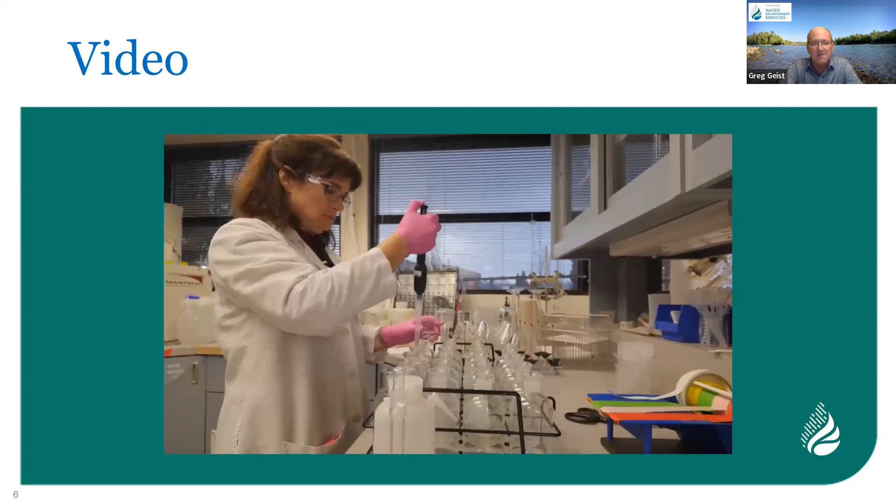I love so many things about Clackamas County. There's so many opportunities for recreation and the people are amazing. But what really sticks out as special for me is the water, our lakes, our streams, our rivers. There's something just magical about water. It's as important as the air that we breathe. It provides our health. It provides our food. It provides our sustenance. We need to make sure the rain that falls on the ground is clean and safe by the time it reaches our rivers and streams. We call ourselves a learning organization. We need to innovate all the time. We always want to try to get better. And for us, a lot of that is connecting with the community, understanding what their values are, what their priorities are, and making sure that we're positioning ourselves in a way to provide that for them.

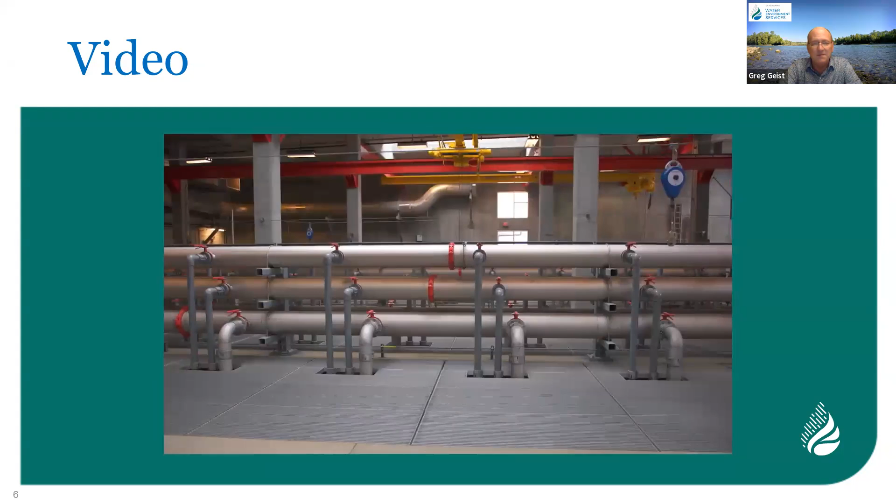We don't call our facilities sewage treatment plants. We call them water resource recovery facilities because that's what they do. They make clean water, that's very important. They also make energy, electricity with what goes down your toilet. And we make fertilizer that we can use out on agricultural fields. People expect clean water. They have high expectations around that. And the idea that we can help protect that, and that's our job, how lucky can a guy get to have that be your job?

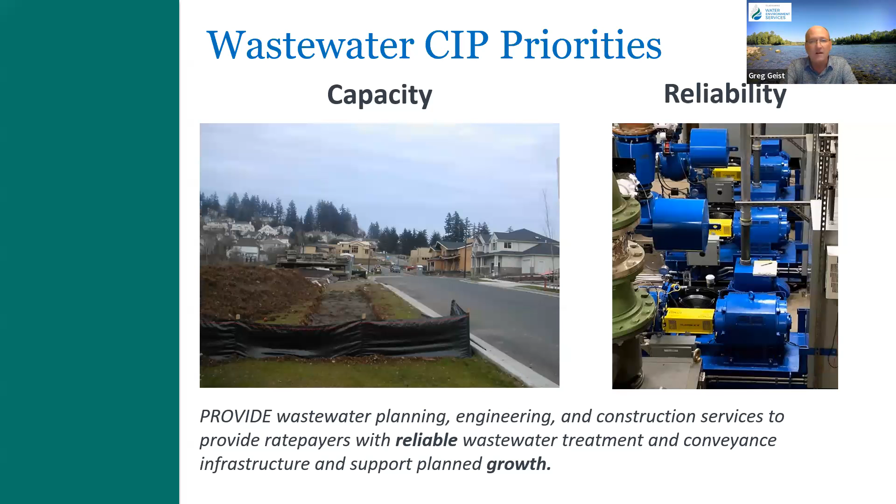When we think about what our capital needs are, like I said, this is primarily a project that we need for future growth and capacity in our collection system. But most of the work that we do is actually more around reliability. We have infrastructure that's been in the ground since the 70s, and a large part of our capital investment is to maintain the assets that we currently have. The other piece, 50-50, 60-40, is around capacity. And again, that's what this project is primarily about, although there are reliability components to it as well. Next slide.

So, again, we try to take a very thoughtful approach to how we present these projects, how we develop these projects, and how we pay for these projects. So what we have is what we call a 5-year capital improvement plan. And that is a synthesis of all of those master planning studies that we have done, coupled with a financial analysis that determines how we can pay for those projects over time. So we start with a 5-year capital improvement plan. We have an annual capital budget that's based on that.

We run that through our financial modeling and forecasting to make sure that we can pay for it and that we can sequence our capital plans in a way that results in reliable and predictable rate increases over time. We propose that budget to our advisory committee. Ultimately, it goes to the Board of County Commissioners for approval. So this is one of many projects in our 5-year capital improvement plan. And again, there's opportunities for stakeholder involvement throughout. And this is really the kickoff of that stakeholder involvement for this particular capital project. Next slide.

And I guess with that, we can start getting into the details and what this project really is and what it's all about and where it's going to be and how it's going to unfold. So I will hand it off to Jessica Rinner, who's the project engineer for this project.

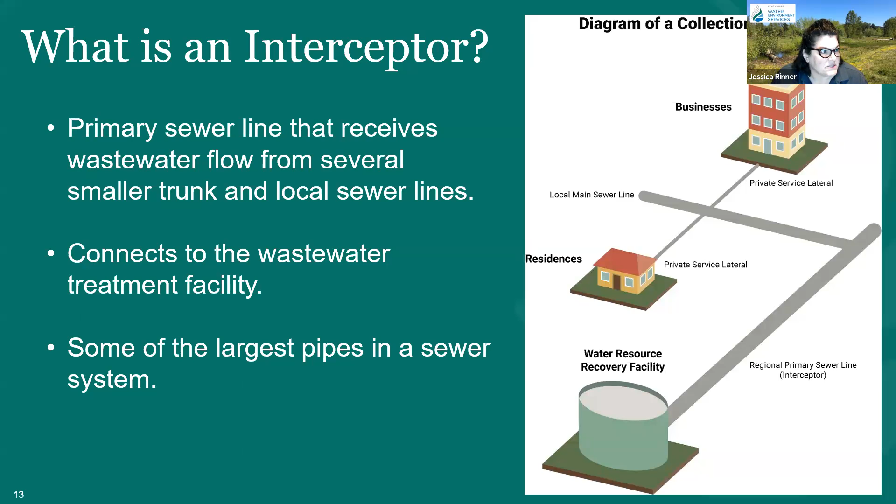So why is this capital project needed? As Greg mentioned earlier, WES does a lot of planning to make sure we have the appropriate infrastructure in place to serve our customers and our community. One of these planning documents is the Sanitary Sewer Collection System Master Plan. A master plan, as you saw in an earlier slide, is a very common document that utilities or service providers use. It is a tool used to evaluate the existing conditions and then project or plan what will be needed in the future. Our master plan has a 20-year planning period.

Our last master plan was completed in 2019 and projects wastewater flows through 2040. From this plan, we can then determine when and where in our collection system we need to do improvements to address these future flow conditions. Also at this time, I just wanted to briefly touch on what flow is. I work in sanitary sewer collection systems. Flow is the wastewater that is transported in the collection system to the treatment facilities.

When working in the collection system, there are two very distinct flow patterns. One is our dry weather flow. This occurs in the dead of summer when the ground is dry, creeks, streams, rivers are all at their lowest points. Dry weather flow is concentrated wastewater from the homes and businesses that are served by the collection system. It is the lowest amount of flow that we need to transport through our system and treat at our facilities. Dry weather flow is easy to predict. We know how many homes and businesses are connected to the sanitary sewer and how much wastewater these typically generate in a day. So dry weather flow is very predictable.

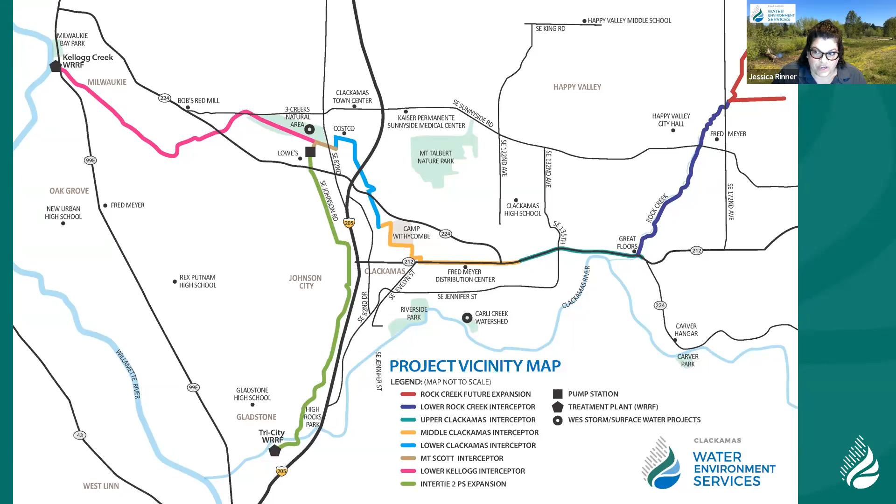Next slide, please. So now we're going to focus just in on the Clackamas Area Interceptor Improvement Project. We have set this presentation up to feel like a virtual driving tour of the project. We're going to start at the most upstream end of the project limits and go with the flow to the end of the project limits. So everyone, please fasten your seatbelts.

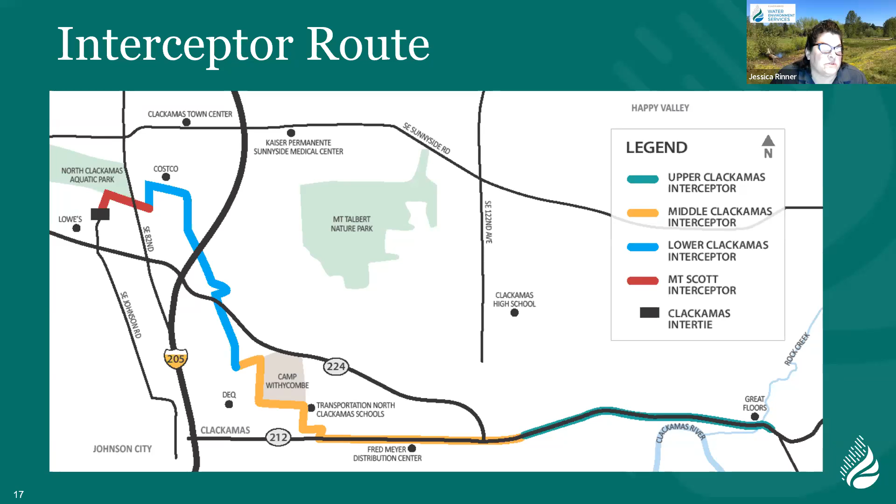So from Great Floors, the existing interceptor runs west, paralleling and sometimes crossing Highway 212 and 224. As I am sure most of you are aware, this highway corridor is very congested with many industries and businesses along the route. It is also very congested with many existing utilities, so finding a space to install a new large diameter sewer will be challenging.

And keep in mind, as I will continue to stress, the new sewer has to continuously slope down so that the wastewater will flow freely. If we build half of this and run into a conflict that we can't go around, we're in trouble. We'll have to remove that conflict. We need to slope down for 5 miles.

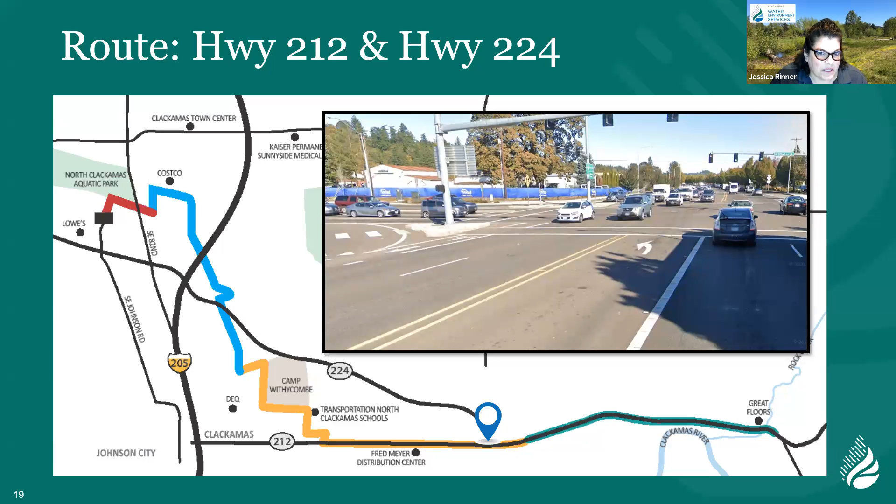The interceptor turns north at approximately 102nd Ave by the North Clackamas Bus Barn and winds its way through the streets, zigging and zagging north and west, crossing in front of Camp Withycombe to our next stop on the tour. This next stop is also the end of the Middle Clackamas portion and the beginning of the Lower Clackamas. Next slide, please. And then at this point, Zach is going to take you through this stop on the tour.

Good evening, everybody. This is our second actual stop along the tour. At this site, we're just north of Highway 212 and Camp Withycombe is just to the east. Just north are the radio towers you're probably all familiar with along the I-205 corridor near the Sunnyside exit. At this site, our interceptor crosses the main railroad line in this area. We will need to employ alternate construction options or alternate routes at this site because it's not possible to dig across or through that facility.

There are other issues that go along with this site as far as access, high groundwater, and flat topography that will present some construction issues and maintenance issues as well. Next slide.

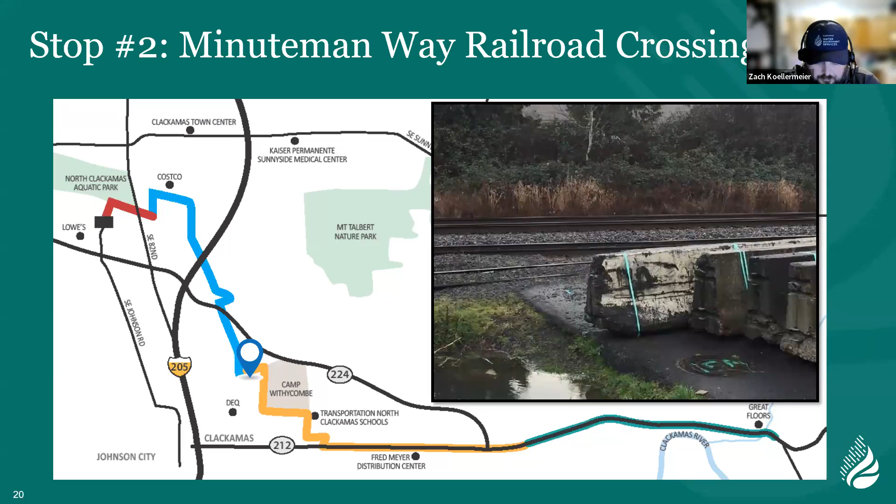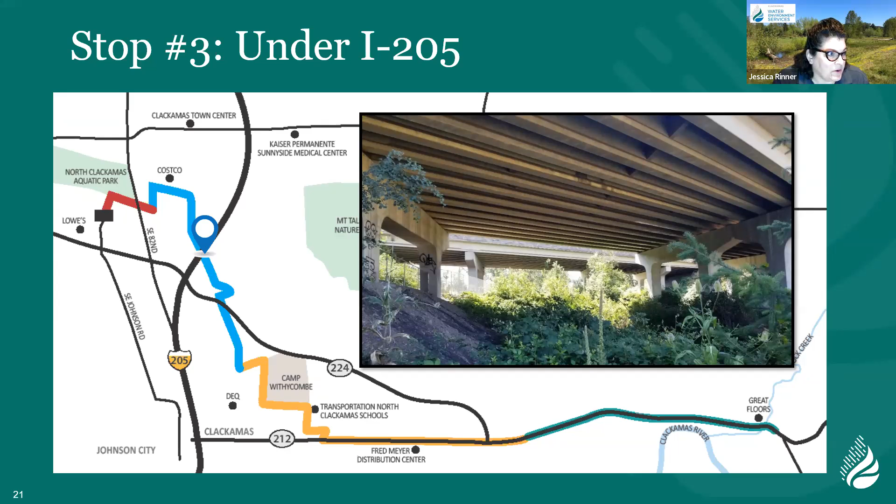Cool. Thank you, Zach. So continuing along our route, we are now following the alignment of the Lower Clackamas Interceptor, and we come to where the interceptor will need to get under I-205. That's what is in the picture above us. In this location, we have an elevated portion of I-205, we have a creek, we have environmentally sensitive areas, and we have the ODOT bike path, which is heavily used by bikers commuting through the area. We are looking at trenchless installation methods to install a new pipe here. Next slide, please.

This is a low-lying, environmentally sensitive area with wetlands and stormwater control ponds in close vicinity. We also have, if you were able to pan your head and look to the right, 82nd Ave is elevated and crosses the tracks and the creek at this point as well. Again, a very tight, difficult location to install large diameter pipe.

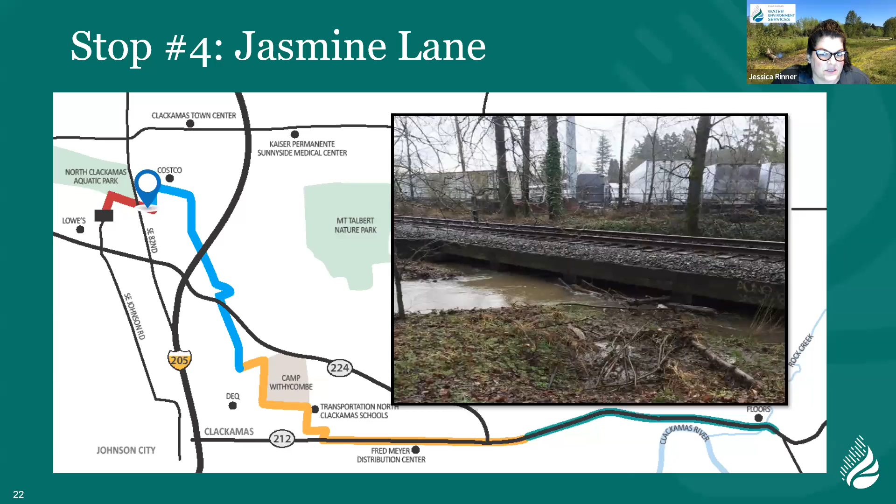A trenchless installation method will be used here to get under the creek and the railroad tracks. Once we are on the south side of the tracks, the pipe will continue west to the next stop on our tour, which Zach will tell you more about. Next slide, please.

This is our 5th stop along the tour. At this site, we're just north of the Intertie 2 pump station, and the two landmarks you may be familiar with are we're just north of Lowe's and the McFarland's landscape off of Highway 224. This is the downstream extent of this project.

We do have a project at our Intertie 2 facility to increase capacity to divert flow to our Tri-City water resource recovery facility. This is where we have the ability to increase our capacity to meet future needs. This project will be closely coordinated with this pump station project. The key takeaway from this site was the size and magnitude of the pipe currently, and how much larger we will be making it as part of this project.

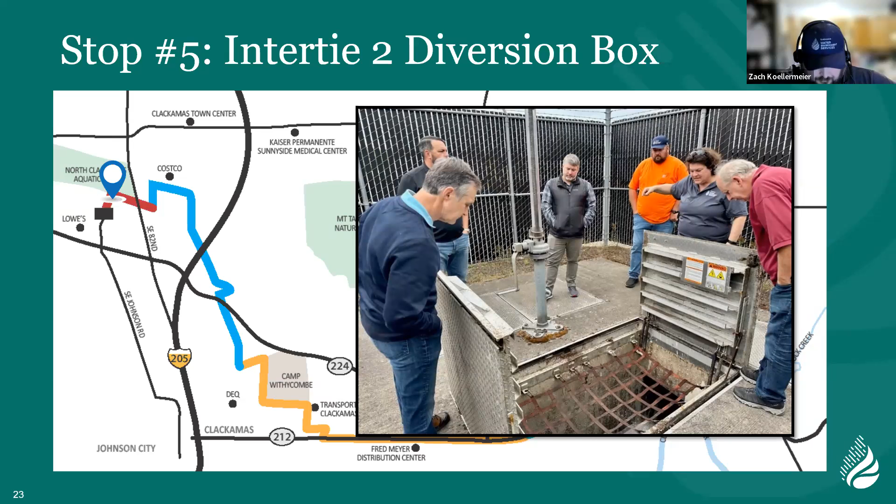You can see us looking down on the hole, and you could hear and see the magnitude of the flow there. This was the one site that we opened and allowed participants on the tour to look in to the current facility. Next slide.

So as Zach mentioned, the last stop we wanted to share with you, it's not part of our Clackamas Area Interceptor Improvement Project, but it is being upgraded currently by WES. It is our Intertie 2 pump station. This pump station uses electricity to pump sewage away from our Kellogg Creek facility to our Tri-City facility for treatment. The station was constructed in about the 2012 timeframe and can pump up to 10 million gallons a day of wastewater.

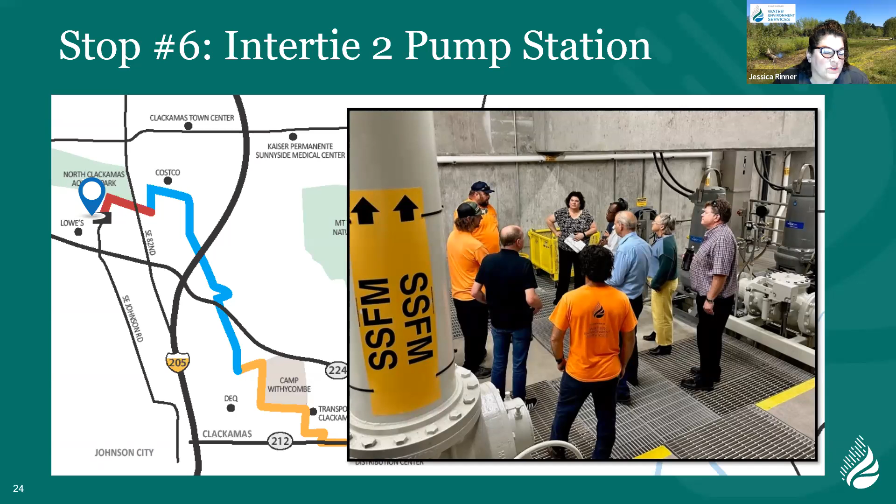WES is currently increasing the capacity of this pump station and force main to pump approximately 20 million gallons a day to our Tri-City water resource recovery facility for treatment. Next slide, please. So now that we have shown you the route and some of the more challenging locations where this project will install new interceptor pipe, we wanted to give you an update on the schedule and activities. Our project manager, Eric from Carollo, will share this with you. Next slide, please. Thank you, Jessica.

So with a project of this magnitude, as you can well expect, it's going to take many years to identify routes, design it, and construct these improvements. So for this first phase of the project, we are designing all of the pipelines up through a 60% design, so that we can ensure, as Jessica mentioned, that we can get all 5 miles of this pipe into a location that has the least amount of disruption to other utilities and impacts to the public, but yet also can convey that flow by gravity all the way to the Intertie 2 pump station, or the diversion structure, as part of this project.

So you'll see, as part of this schedule, we've started with the field work through fall and winter of this year, and then it'll proceed straight into 30% design of selected alternatives of how we get across some of those challenging features, like the Rock Creek Ravine and under I-205, and then again under the Mount Scott Creek and the railroad that you saw all along the route. We'll also be taking that all the way through 60% design, and we'll be starting to look at any property acquisition that is required to construct these improvements.

And Jessica, this is for you and Zach, because you referenced a few times along the route trenchless technology. So what is a trenchless installation? And also, could you add, why are we using it? Why is it important? Sure. Yeah, there's a couple ways to install pipe. One way is to dig a big long trench and lay the pipe in from above. And that can be done when the surface conditions aren't that difficult.

But then there's also multiple trenchless technologies. Trenchless doesn't mean there's no holes. It means there's a lot less holes. There's typically a receiving pit and a launching pit, and the pipe is installed through the ground, whether it's drilled or jacked or bored or whatever technology it is that's used. But there's multiple ways where you don't have to open up the whole length. And that's what trenchless is. Again, doesn't mean no holes, just means less holes. Does everybody agree with that?